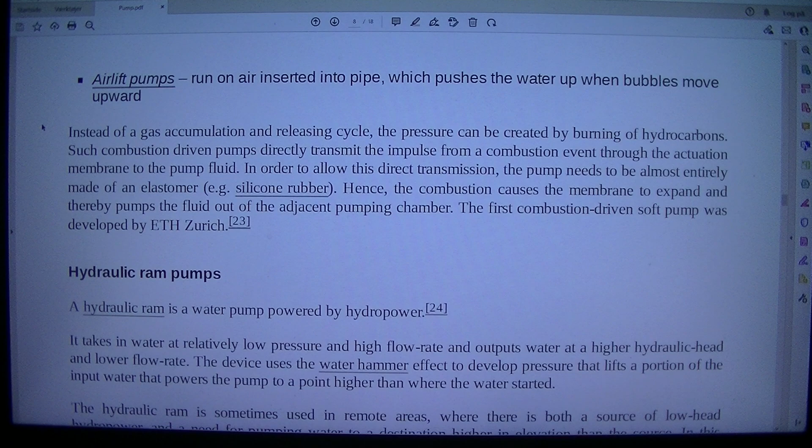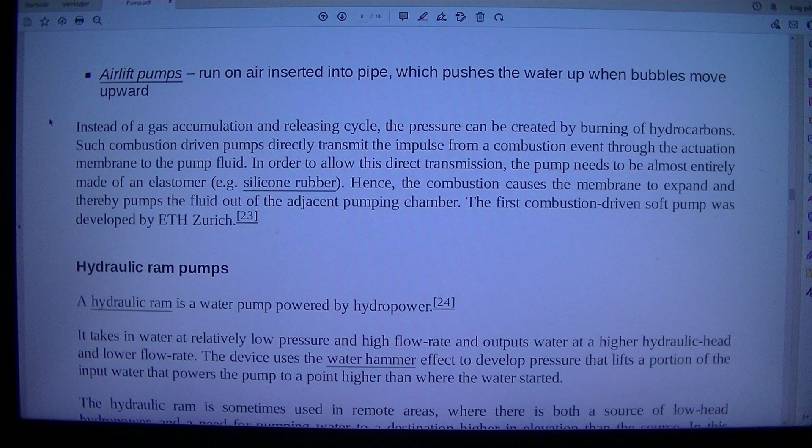Yes, I need to clean my nose. And I'm freezing a little bit, so I have to get below. I'm freezing a little bit, so I have to get right into my bed. No, this is my blankets, I'm sleeping below this one. I like to get below this. And when it's really hot, I do not have this blanket on. So I like to get below here, it's a little bit more hot.

No, that will take, I don't know, some 100 hours to read all this, there's so many.

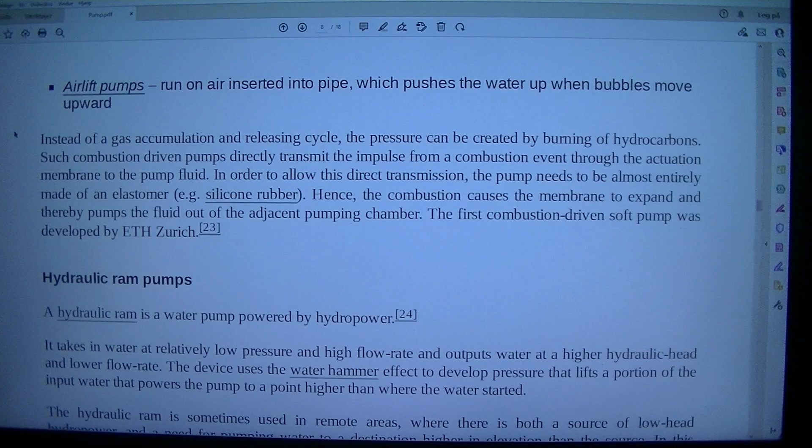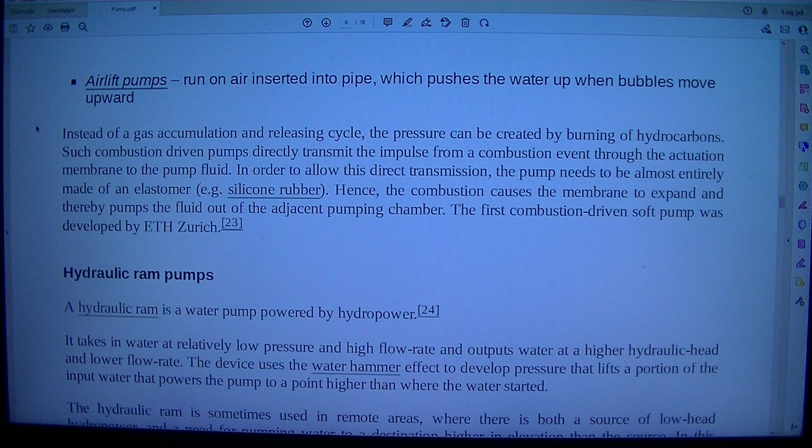Good, let's try again. The video will split in 10 minutes. I don't think we can do this.

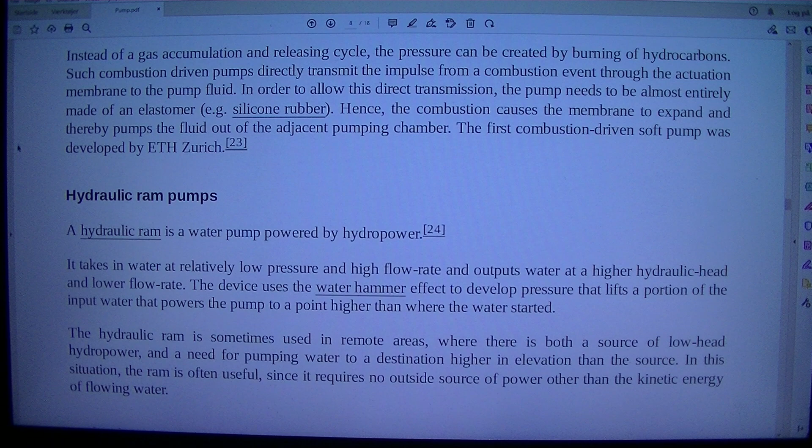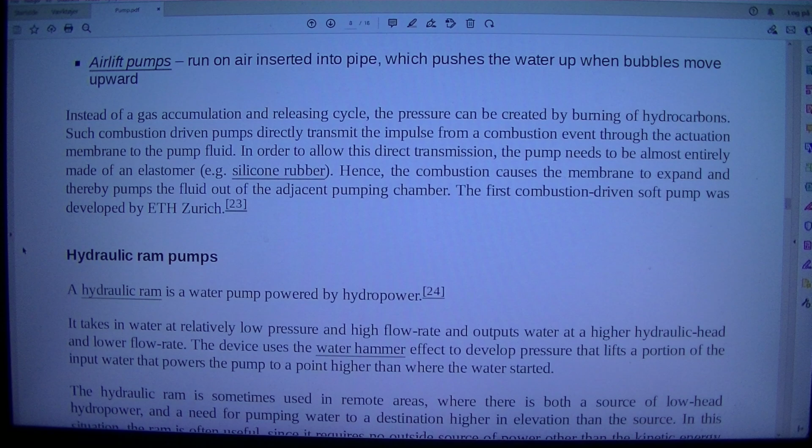Air lift pumps run on air inserted into a pipe, which pushes the water up as bubbles move upward. Instead of a gas accumulation and releasing cycle, the pressure can be created by burning of hydrocarbons. Such combustion-driven pumps directly transmit the impulse from a combustion event through the actuation membrane to the pump fluid. In order to allow this direct transmission, the pump needs to be almost entirely made of an elastomer, for example silicone rubber. Hence, the combustion causes the membrane to expand and thereby pumps the fluid out of the adjacent pumping chamber. The first combustion-driven soft pump was developed by ETH Zurich.

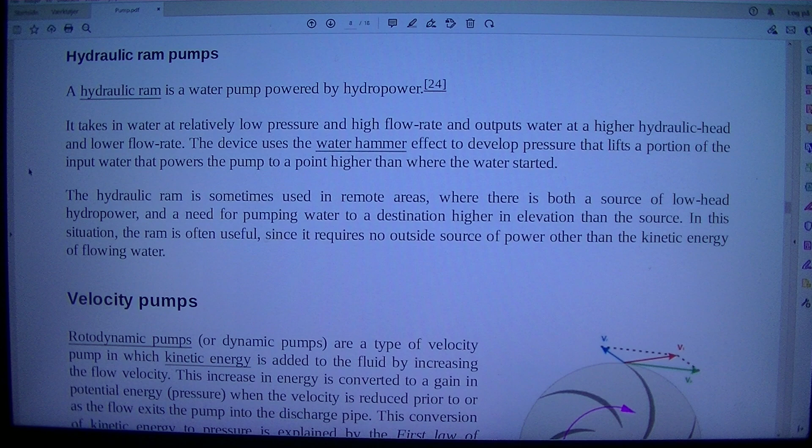Hydraulic ram pumps: a hydraulic ram is a water pump powered by hydropower. It takes in water at relatively low pressure and high flow rate and outputs water at a higher hydraulic head and lower flow rate. The device uses the water hammer effect to develop pressure that lifts a portion of the input water that powers the pump to a point higher than where the water started. The hydraulic ram is sometimes used in remote areas, where there is both a source of low head hydropower and a need for pumping water to a destination higher in elevation than the source.

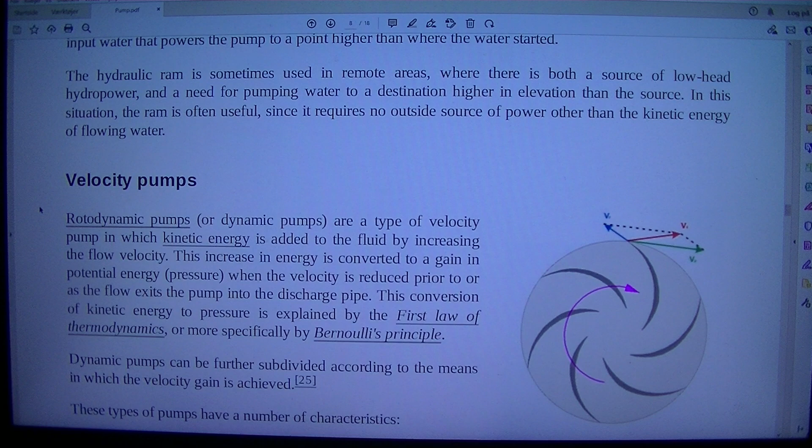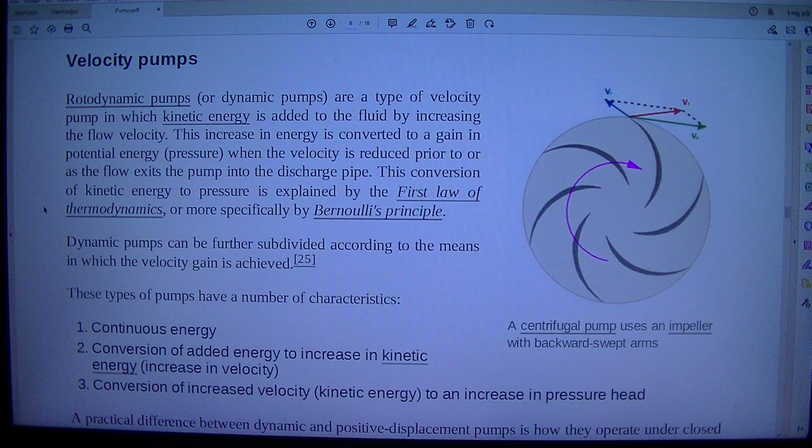In this situation, the ram is often useful, since it requires no outside source of power other than the kinetic energy of flowing water. Velocity pumps: a centrifugal pump uses an impeller with backward swept arms. Rotodynamic pumps, or dynamic pumps, are a type of velocity pump in which kinetic energy is added to the fluid by increasing flow velocity. This increase in energy is converted to a gain in potential energy, or pressure, when the velocity is reduced prior to or as the flow exits the pump into the discharge pipe. This conversion of kinetic energy to pressure is explained by the first law of thermodynamics, or more specifically by Bernoulli's principle. Dynamic pumps can be further subdivided according to the means by which the velocity gain is achieved.

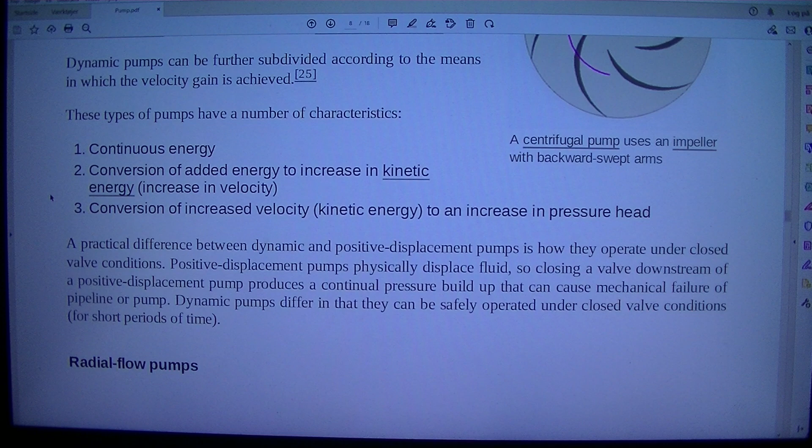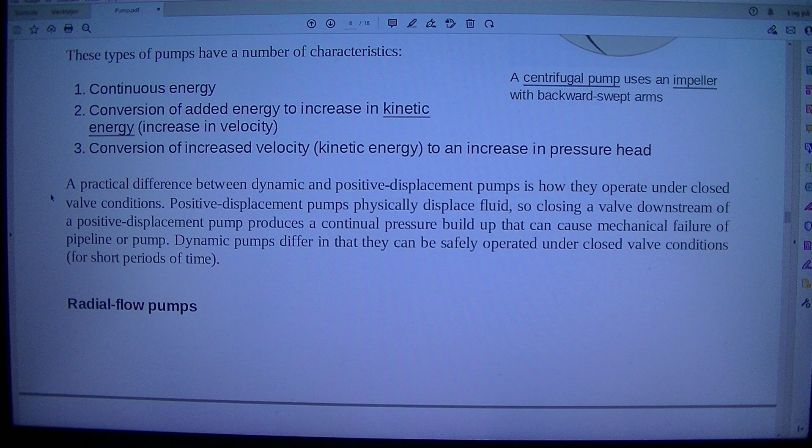These types of pumps have a number of characteristics: 1. Continuous energy. 2. Conversion of added energy to an increase in kinetic energy, or velocity. 3. Conversion of increased velocity, kinetic energy, to an increase in pressure head. A practical difference between dynamic and positive displacement pumps is how they operate under closed valve conditions. Positive displacement pumps physically displace fluid, so closing a valve downstream of a positive displacement pump produces a continual pressure build-up that can cause mechanical failure of the pipeline or pump. Dynamic pumps differ in that they can be safely operated under closed valve conditions for short periods of time. Radial flow pumps.

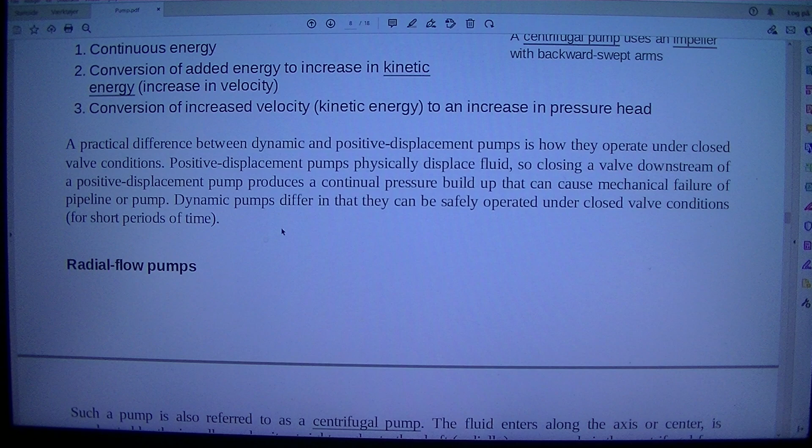Such a pump is also referred to as a centrifugal pump. The fluid enters along the axis or center, is accelerated by the impeller, and exits at right angles to the shaft, radially. An example is the centrifugal fan, which is commonly used to implement a vacuum cleaner.

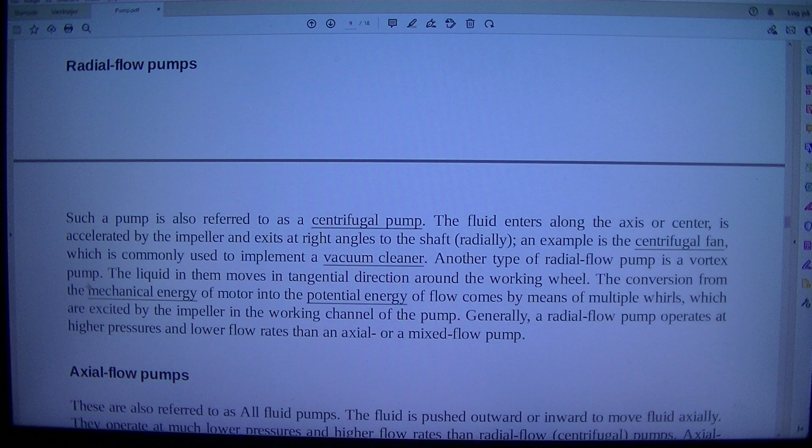Another type of radial flow pump is a vortex pump. The liquid in them moves in a tangential direction around the working wheel. The conversion from mechanical energy of the motor into the potential energy of flow comes by means of multiple whirls, excited by the impeller in the working channel of the pump.

Generally, a radial flow pump operates at higher pressures and lower flow rates than an axial or a mixed flow pump. Axial flow pumps are also referred to as all-fluid pumps.

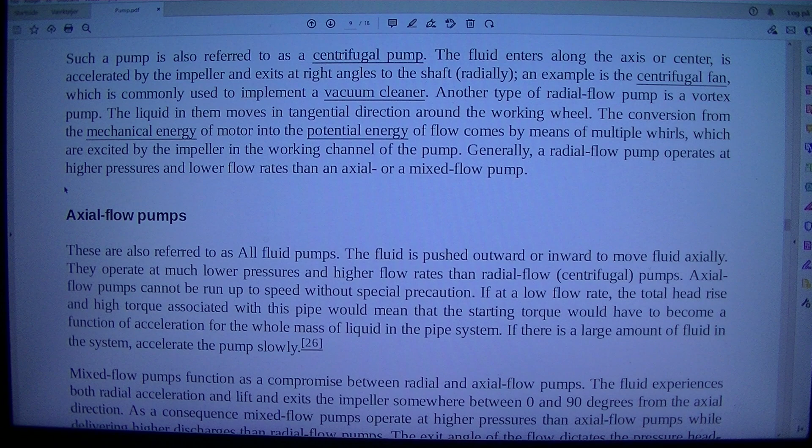The fluid is pushed outward or inward to move fluid axially. They operate at much lower pressures and higher flow rates than radial flow, centrifugal pumps. Axial flow pumps cannot be run up to speed without special precaution.

If at a low flow rate, the total head rise and high torque associated with this would mean that the starting torque would have to become a function of acceleration for the whole mass of liquid in the pipe system. If there is a large amount of fluid in the system, accelerate the pump slowly.

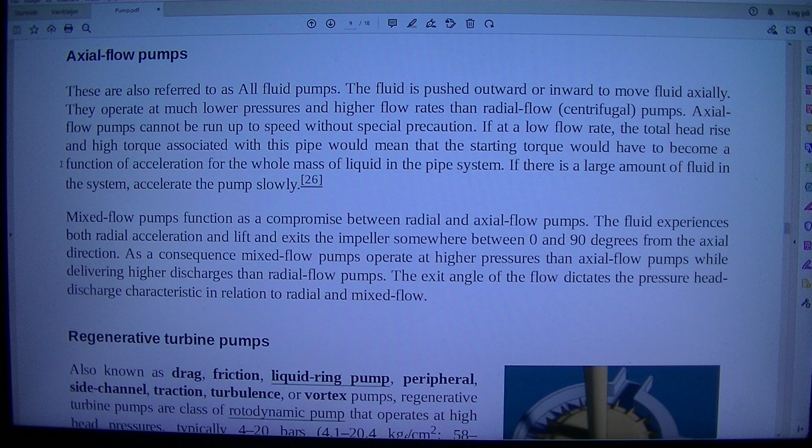Mixed flow pumps function as a compromise between radial and axial flow pumps. The fluid experiences both radial acceleration and lift, and exits the impeller somewhere between 0 and 90 degrees from the axial direction.

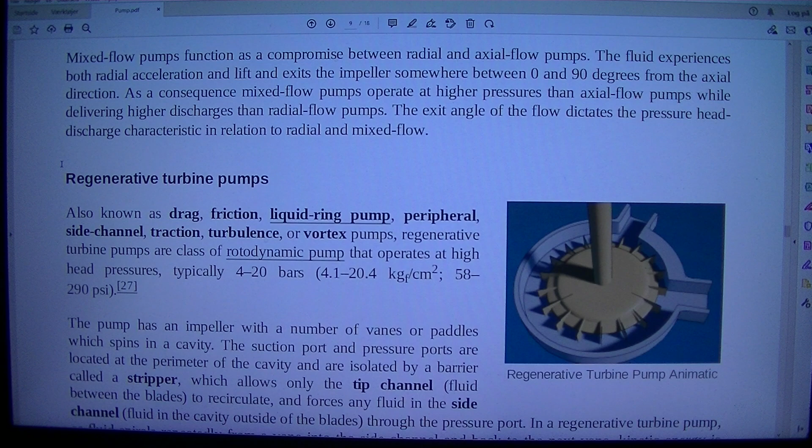As a consequence, mixed flow pumps operate at higher pressures than axial flow pumps while delivering higher discharges than radial flow pumps. The exit angle of the flow dictates the pressure head discharge characteristic in relation to radial and mixed flow. Regenerative turbine pumps.

Regenerative turbine pump animatic. Also known as drag, friction, liquid ring pump, peripheral, side channel, traction, turbulence, or vortex pumps. Regenerative turbine pumps are a class of rotodynamic pump that operates at high head pressures, typically

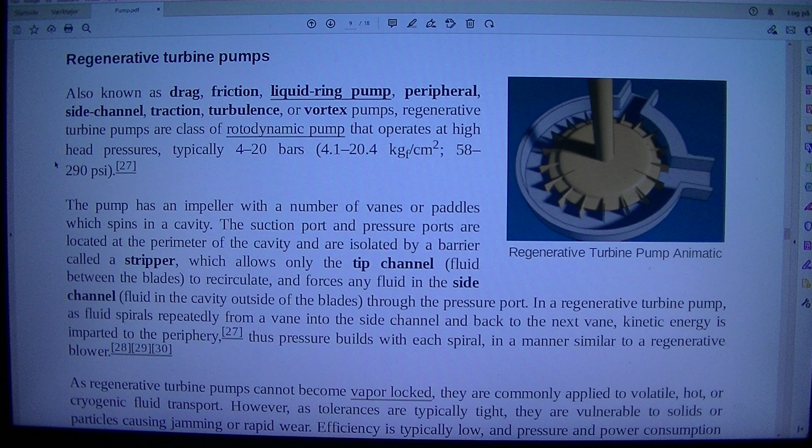4 to 20 bars, or 4.1 to 20.4 kgf per square centimeter, 58 to 290 psi. The pump has an impeller with a number of vanes or paddles which spins in a cavity.

The suction port and pressure ports are located at the perimeter of the cavity and are isolated by a barrier called a stripper, which allows only the tip channel fluid between the blades to recirculate, and forces any fluid in the side channel, fluid in the cavity outside of the blades, through the pressure port.

In a regenerative turbine pump, as fluid spirals repeatedly from a vane into the side channel and back to the next vane, kinetic energy is imparted to the periphery. Thus pressure builds with each spiral, in a manner similar to a regenerative air blower.

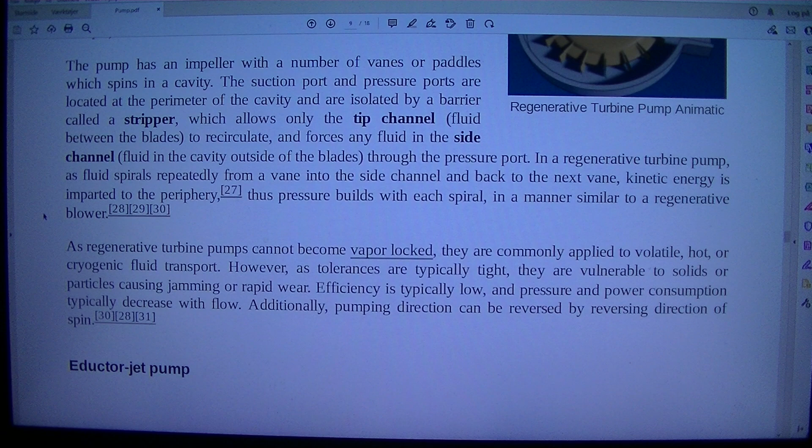As regenerative turbine pumps cannot become vapor-locked, they are commonly applied to volatile, hot, or cryogenic fluid transport. However, as tolerances are typically tight, they are vulnerable to solids or particles causing jamming or rapid wear.

Efficiency is typically low, and pressure and power consumption typically decrease with flow. Additionally, pumping direction can be reversed by reversing direction of spin. Eductor jet pump.

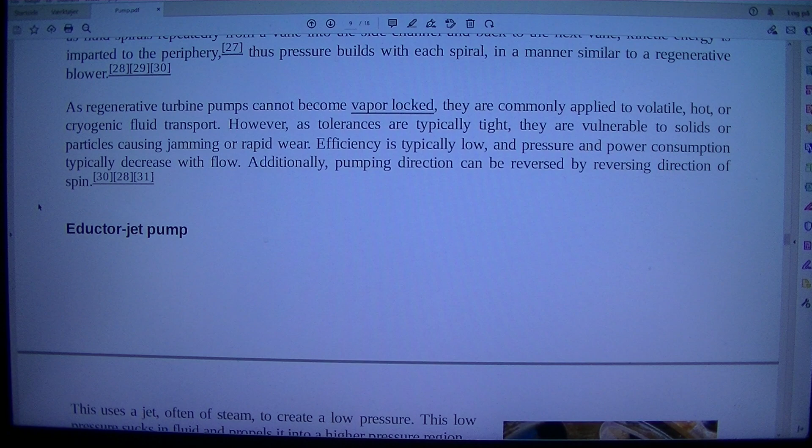Regenerative turbine pump, 2/3 HP. Regenerative turbine pump rotor and housing, 2/3 horsepower, 0.25 kilowatt, 85 millimeters, 3.3 inches diameter. Impeller rotates counterclockwise. Left, inlet. Right, outlet.

0.4 millimeters, 0.016 inches thick vanes on 4 millimeters, 0.16 inches centers. This uses a jet, often of steam, to create a low pressure. This low pressure sucks in fluid and propels it into a higher pressure region.

Gravity pumps include the siphon and Heron's fountain. The hydraulic ram is also sometimes called a gravity pump. In a gravity pump, the water is lifted by gravitational force, hence the name gravity pump.

Steam pumps have been for a long time mainly of historical interest. They include any type of pump powered by a steam engine, and also pistonless pumps such as Thomas Savery's or the pulsometer steam pump. Recently there has been a resurgence of interest in low-power solar steam pumps for use in smallholder irrigation in developing countries.

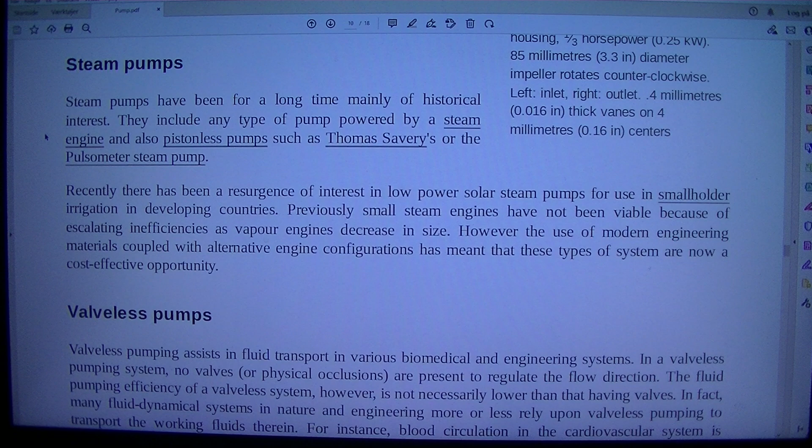Previously, small steam engines have not been viable because of escalating inefficiencies as vapor engines decrease in size. However, the use of modern engineering materials coupled with alternative engine configurations has meant that these types of systems are now a cost-effective opportunity. Valveless pumps.

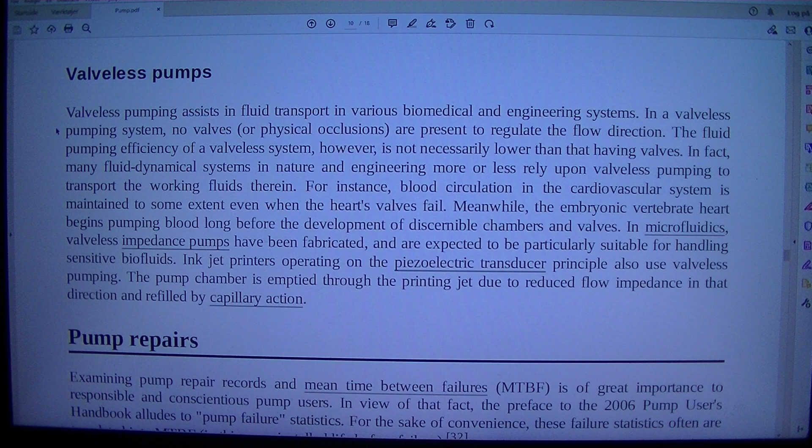Valveless pumping assists in fluid transport in various biomedical and engineering systems. In a valveless pumping system, no valves or physical occlusions are present to regulate the flow direction. The fluid pumping efficiency of a valveless system...